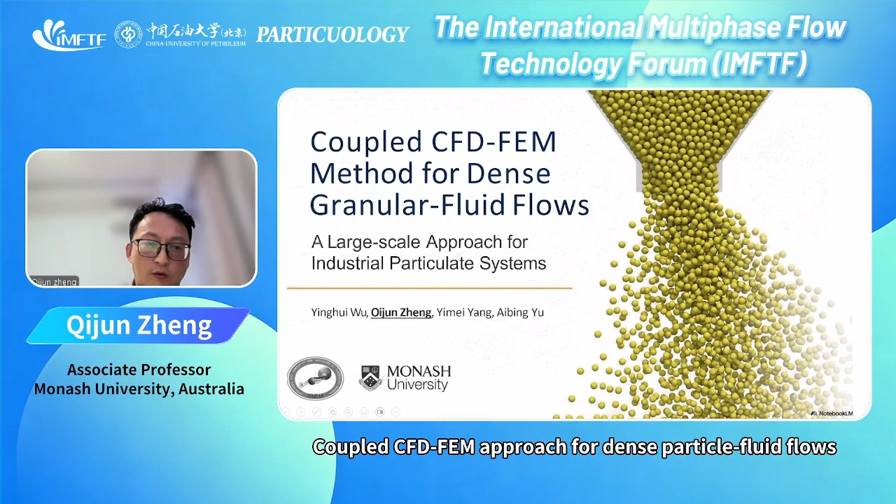This is work we have done in our group, by me under the supervision of Professor Aibing Yu, and recently other PhD students have joined this project, for example Dr. Yinghui Wu and Dr. Yang, who have also done a lot of work. This is the outline of my presentation.

I think Shibo has given a very good introduction about particles. Over 70% of industry products actually exist as bulk solids, and on Earth, particles like sand are the second most common matter after water. So I don't think I need to introduce more about particles.

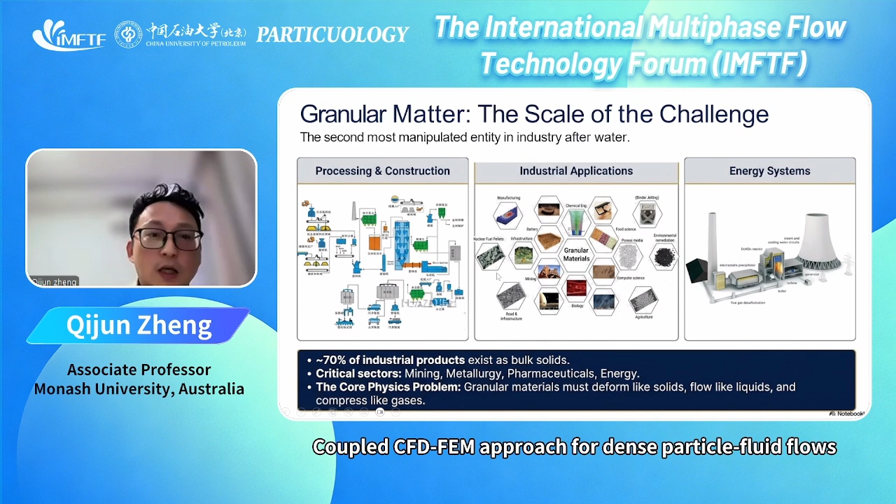So here's the problem: particles can behave very differently under different load conditions. For example, it can be very dilute, like a gas, or like a fluid, which we call dense flow. And in some cases it is quasi-static, so the particles don't move and keep still.

So currently, if we want to develop continuum models, there are different theories. For dilute flow we have kinetic theory. For dense flow we have viscoplastic models, or granular rheology models. And for quasi-static states, like soils and sand, we basically use elastoplastic models. So we have different models, and the different model frameworks are quite different.

But the problem is that in industries, in many cases the different states coexist simultaneously. So what we try to do in this work is unify the models for dense flow and quasi-static flow, because this is a challenge for current TFM models.

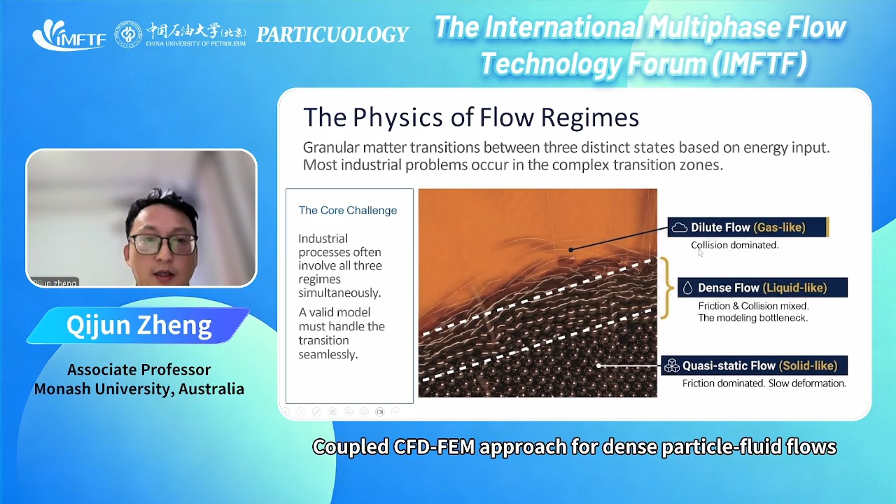Here I'd like to mention two popular methods. First is the discrete method, CFD-DEM. This method, as we all know, has high fidelity because it tracks every particle, but it is computationally very expensive.

The continuum model for particle-fluid flow is the two-fluid model, TFM, which can be found in commercial software like ANSYS. It's computationally efficient and works in a lot of situations, but when it comes to quasi-static or very dense flow, TFM often fails.

This is a well-known challenge, and the inherent reason is that TFM uses kinetic theory enhanced by a friction stress model to describe the particles. But when it becomes quasi-static, that kind of model is not that accurate.

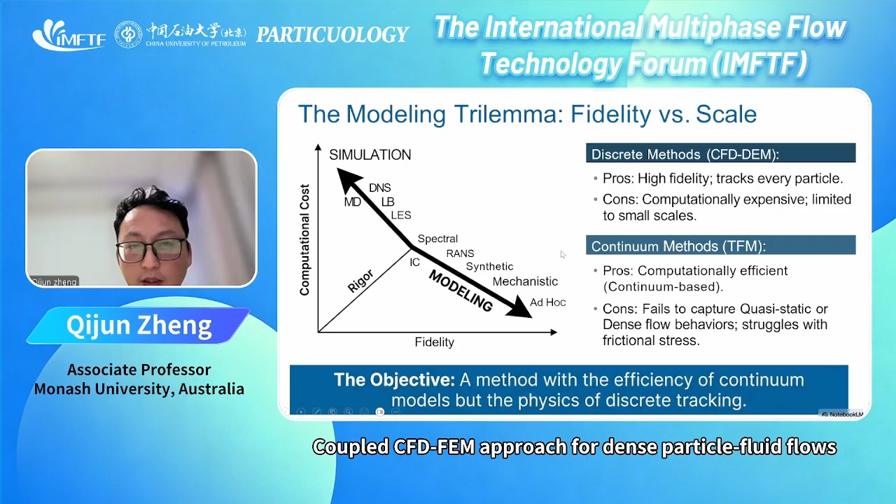So this is the overall idea of our project: we actually want to replace the kinetic theory with elastoplastic theory, because with elastoplastic theory we can well describe both the quasi-static and the dense flows.

But for this purpose we need a new method. We cannot use CFD because CFD cannot implement elastoplastic theory, so we actually need to use FEM, finite element method. But ordinarily in traditional soil mechanics we use Lagrange FEM, which does not work for us because, as I will show later, it often encounters mesh distortion problems.

So here we choose a new FEM method, Euler FEM. As shown in this figure, in this Euler FEM the mesh does not change with time — it's fixed, like in CFD. And the elastoplastic solids move through these meshes like a fluid.

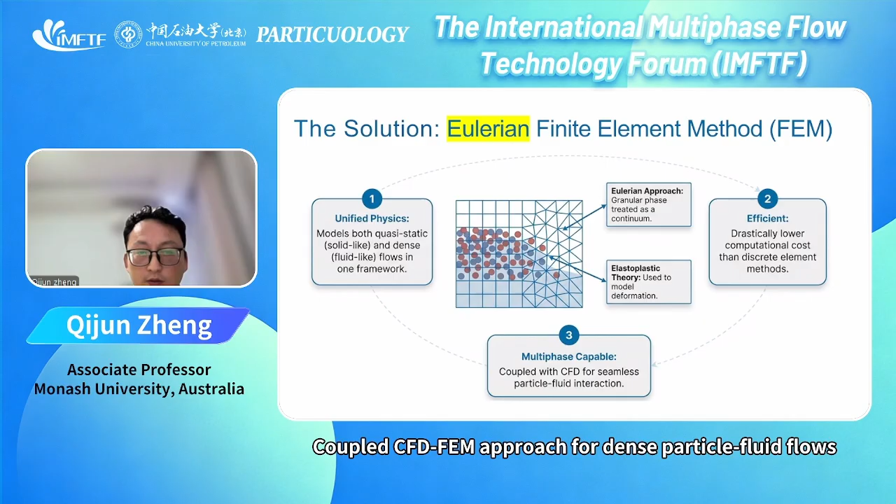We use FEM, Euler FEM for the particle phase, and CFD for the gas or fluid phase. In this project, we couple them, and this will formulate a new model framework for multi-phase particle fluid flows. We hope this idea will provide a new model framework for dense, very dense, or even quasi-static particle fluid systems.

In this talk, I will introduce our method step by step. First, I will introduce how we model the particle flow using the Euler FEM, then I will introduce how we couple the Euler FEM and CFD to create a new multi-phase flow code. Then I will introduce our validations.

Why Euler FEM? If we try to use elastoplastic theory for the particle phase, we cannot use CFD anymore, we need to use FEM. But as shown in the right figure, the ordinary FEM, like that in soil mechanics, when the soils or particles move, the mesh gets distorted. This is not a problem if the mesh quality is still good, but eventually the mesh quality downgrades and finally affects the results.

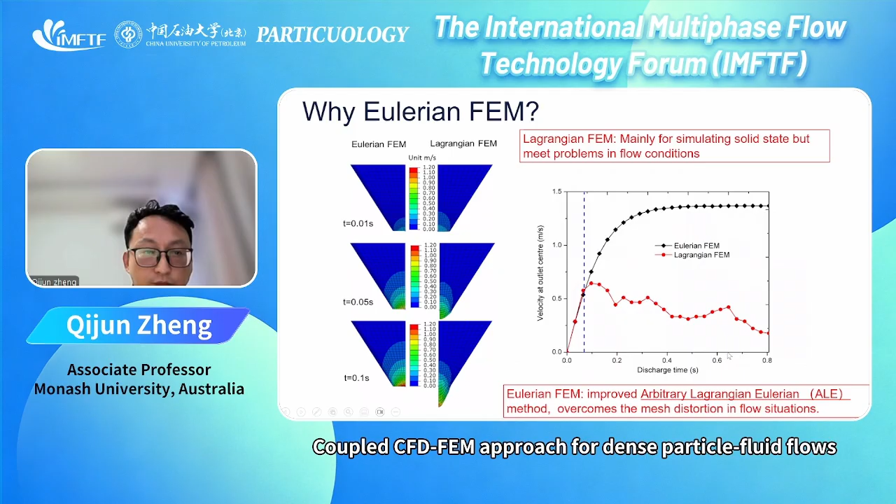That's the governing equation for the Euler FEM. Because it is in Eulerian coordinates, we will get the convection term. In this method, the density is a variable, so this is the compressible governing equation. We have the body force in the momentum equation, but different from CFD, here the calculation of the stress sigma is different.

In CFD, normally the stress will be composed of a pressure term and a viscous stress term, but in this model, we use a visco-elastoplastic model to calculate the stress sigma. Basically, if the deformation is small, the shear stress is small, not enough to drive the particle to flow, which we call the elastic regime, and the stress will be calculated using an elastic law. When the particles start to move, which we call plastic deformation, we use the second line to calculate the stress.

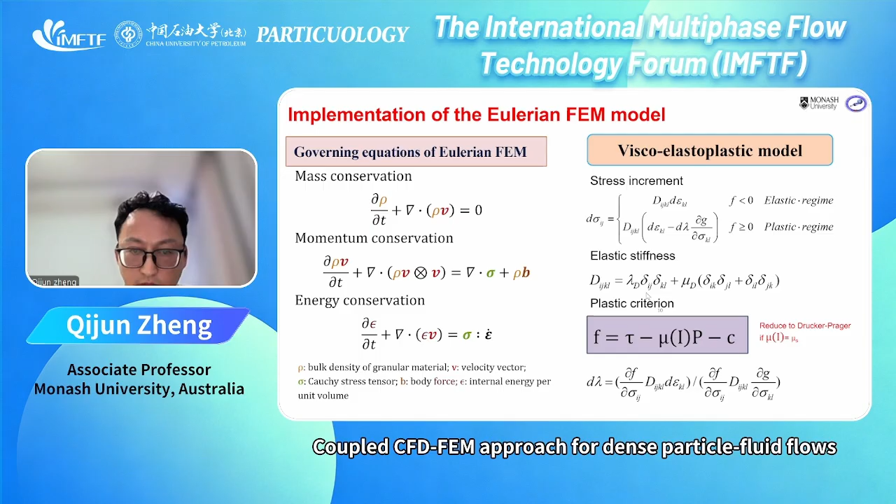Previously, we normally thought that the friction law is a very sudden change. Below that friction line, it's static, solid-like, and above that friction law is flow. But here, if we look more carefully, that transition is more complex than that. The transition is smooth, and also it depends on the particle size, or at least there is a length scale in the state transition.

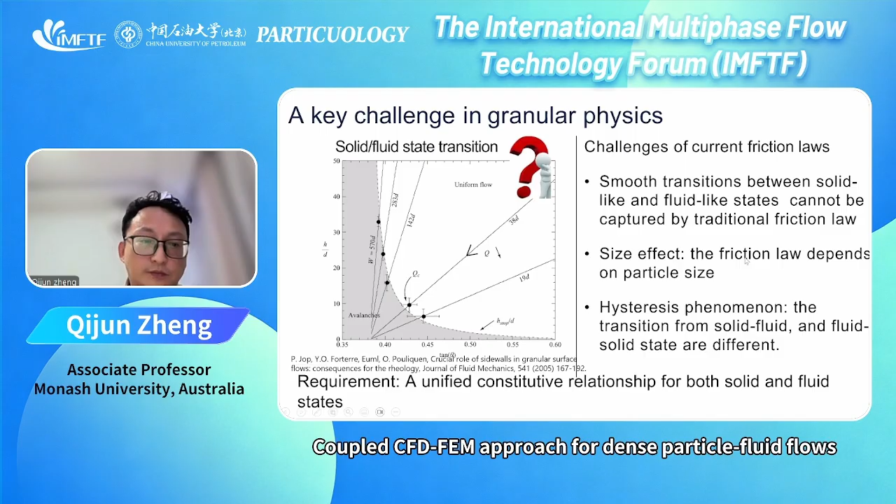So we did some work, theoretical work to address that challenge. I will not give details because today we are giving an overview of our method. I just mentioned we developed a new frictional law. This friction law includes the friction and dilatancy, and also interlocking cohesion.

We can see from this figure, microscopically the particles form many cages formed by the particles. So when the particles need to move, they need to go up for some distance. Previously we knew this and used the variable dilatancy to quantify this behavior.

In our research, we found that we still need another term, called interlock cohesion. This interlock cohesion scales with the particle diameter, the particle density, and also depends on the particle shapes. So we introduced this new friction law.

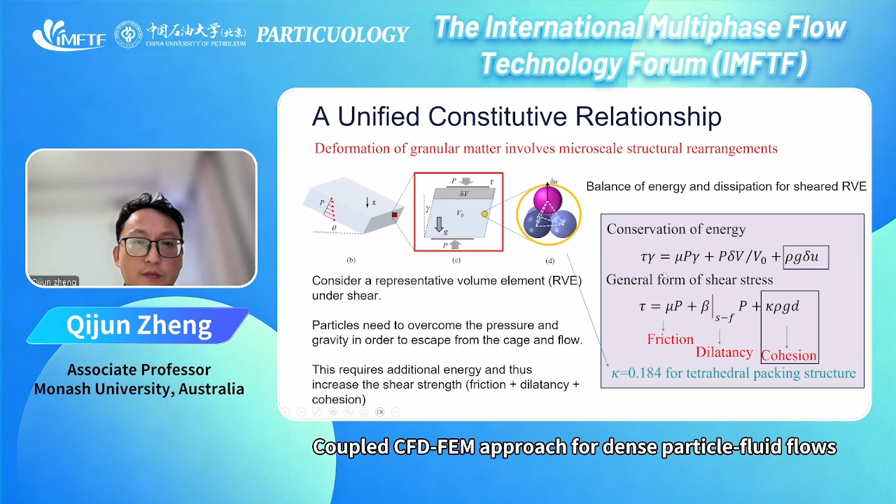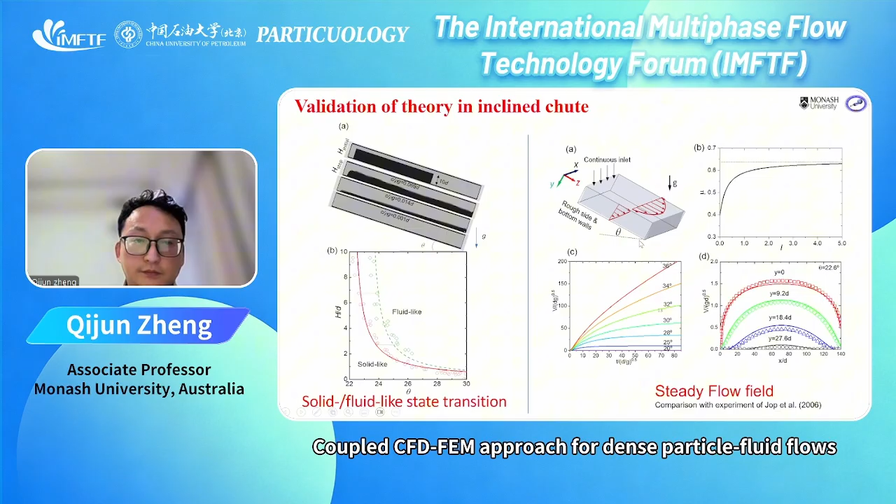So not just testing the model in the inclined chute, we actually tested it in many different granular flow configurations - for example, sandpile, hopper, rotating drum, and blast furnace. I will not talk about that in more detail; if you're interested, you can read some papers.

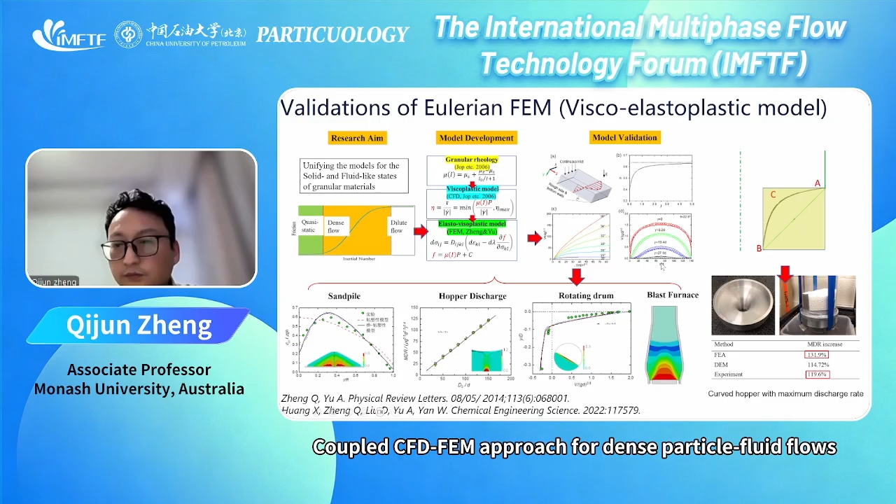So then we will move to the main subject of this presentation: how we couple CFD and FEM to generate a multi-phase flow code. Here is the overview of the CFD-FEM coupling.

Actually, this is a very ordinary method for the coupling, because many multi-phase flow approaches use that kind of method to couple two solvers. Basically, we write a Python code to connect the FEM and CFD.

Basically, we have two solvers, and the two solvers are separate. So we use a Python code to coordinate the two solvers. First the FEM starts, and begins to calculate the granular flow, and we then retrieve the velocity results and solid volume fraction from the FEM results. Also, we get the velocity from the CFD, and then we calculate the drag force, and apply the drag force and the body force to the granular phase and the gas phase.

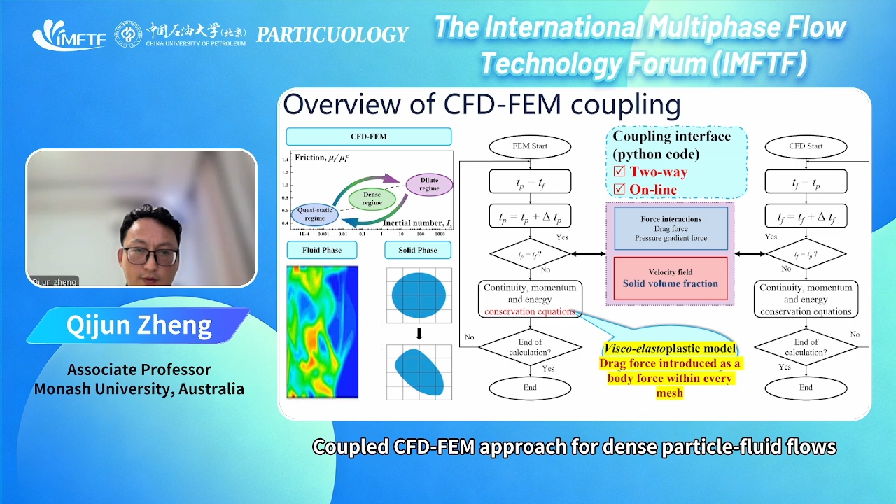So here, how can we make the granular phase become dilute? If we look back to the viscoelastoplastic model, as I mentioned, it has two components: the elastic law and the plastic law. The plastic deformation is often volume conservative. Let's imagine the deformation of some soils.

When the soil moves, the overall volume does not change. This is kind of a constraint imposed by the plastic model. So if we don't consider the dilatancy, the plastic model does not incur volume expansion or contraction. So in plastic deformation, the volume does not change - that means the solid volume fraction does not change.

But in the elastic law, of course, if you consider elasticity, the volume can change. Previously we mostly used linear elasticity, but the linear elasticity is too strong, meaning it's not easy for the bulk granular material to expand its volume or contract.

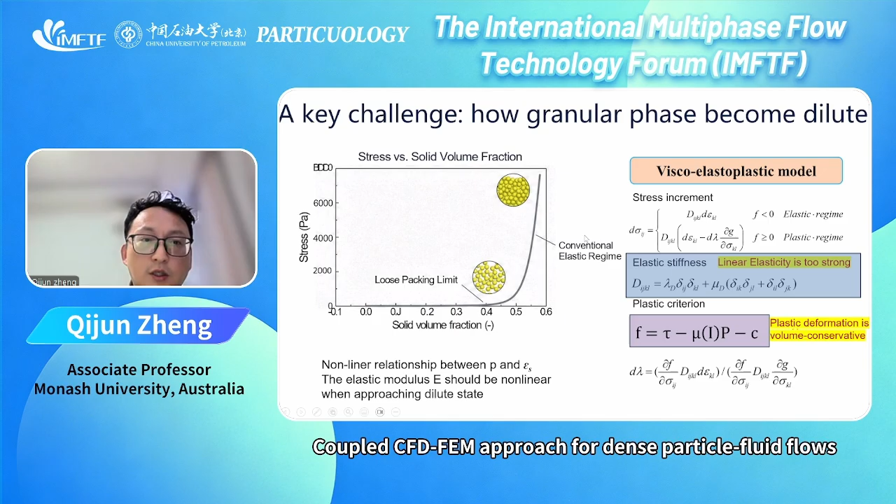So that's the idea. To get a law for the elastic modulus, we actually apply the local average method. We use DEM to model a hopper, and we use the average method to get the solid volume fraction and also the pressure. So that's the results.

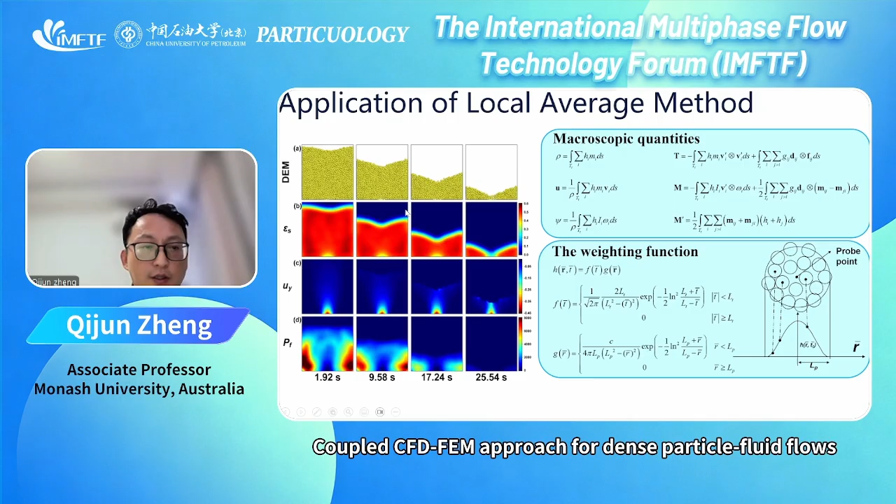Based on the results, we can get a nonlinear model for the elastic modulus E. Basically, when the solid volume fraction is larger than some value near 0.5, the elastic modulus is very large, so the deformation is small. But if it's lower than 0.5, the elastic modulus reduces to a very small value, meaning it can expand its volume.

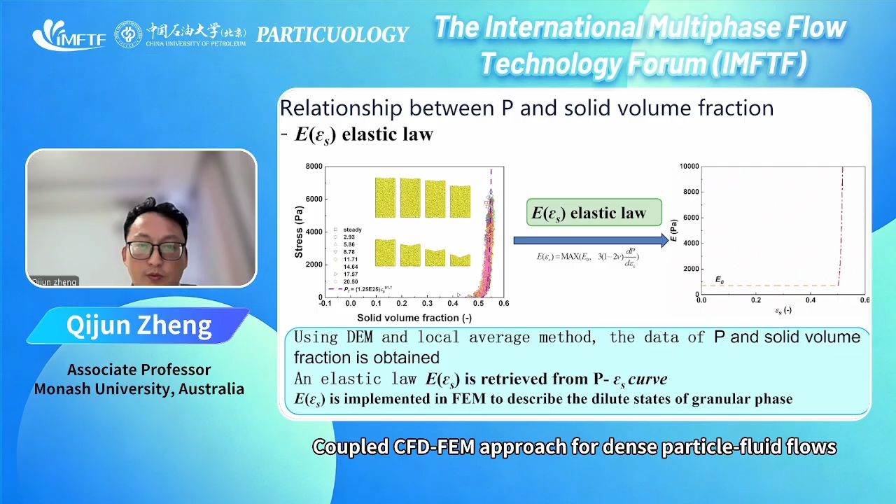Okay, that's a summary of the CFD-FEM method. That's the governing equation for the gas phase and granular phase. As I mentioned, in the FEM the bulk density is a variable, it's compressible. So we get the bulk density and divide by the original particle density to get the solid volume fraction.

We assume that the volume fraction of solid and the volume fraction of the gas equal 1, so we can get epsilon g and epsilon s. And we can use these variables together with the velocities to calculate the drag forces.

On the left are the constitutive models for the granular phase - that's the elastoplastic model framework. Then we introduce the mu(I) rheology, and again we use the elastic E(epsilon s) as the nonlinear elastic law. That's an overview of the whole model.

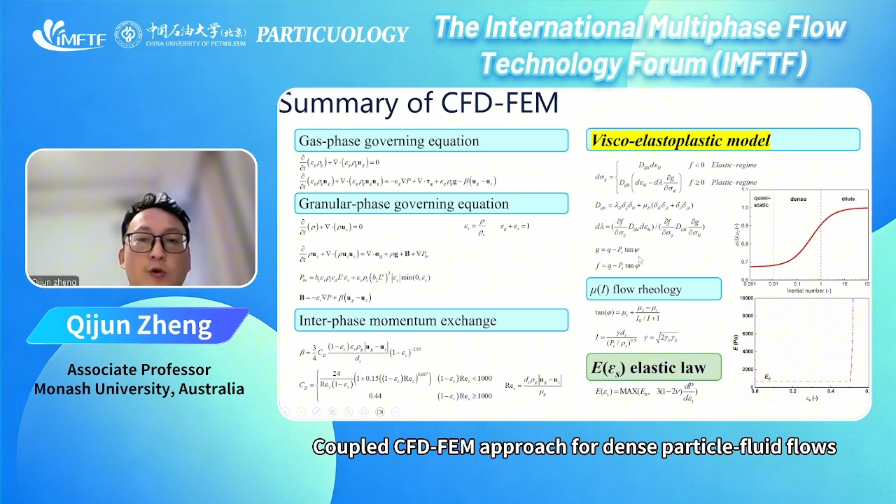Finally, I introduced several validation cases. The first one is the packed bed. The packed bed is very simple.

We inject the gas from the bottom uniformly, and then we measure the pressure drop, and then we can get the relationship between the pressure drop and the velocity under different cases - for example, different particle diameters, different initial solid volume fractions, and different filling levels. We can see that the pressure drop increased as it should be, meaning we actually implemented the drag force correctly in the code.

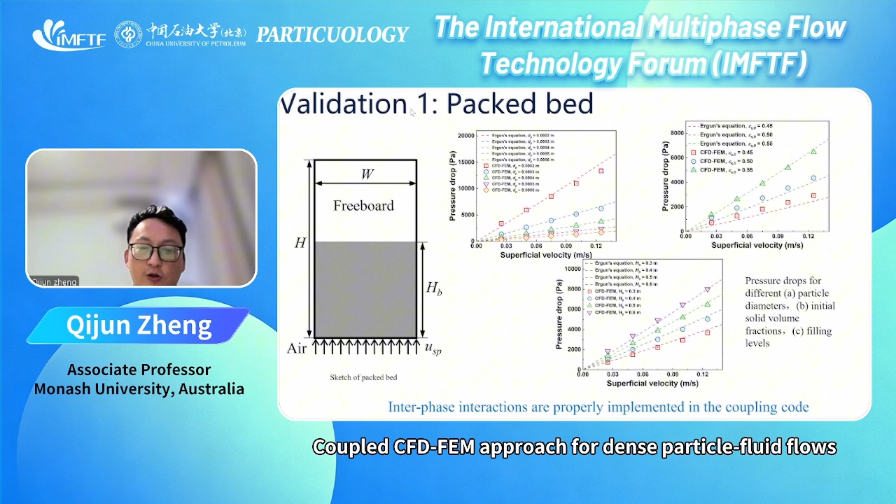Secondly, we model a spouted bed. Here is the animation with the bubble generated by injecting some gases into the granular particle bed. We compared the bubble size with the experiment, and of course if we use different drag force models and different parameters, the results can change somewhat.

But overall we can say it agrees reasonably with the experiment. Of course, the current TFM can model the bubble in the spouted bed, no problem. But we use this example to demonstrate that our method can also model this configuration.

And again, if we further increase the injected gas, it will become the fluidized bed. We actually wanted to reproduce the fluidized bed in this project, but up to now we've not been able to do that. This is a very interesting question.

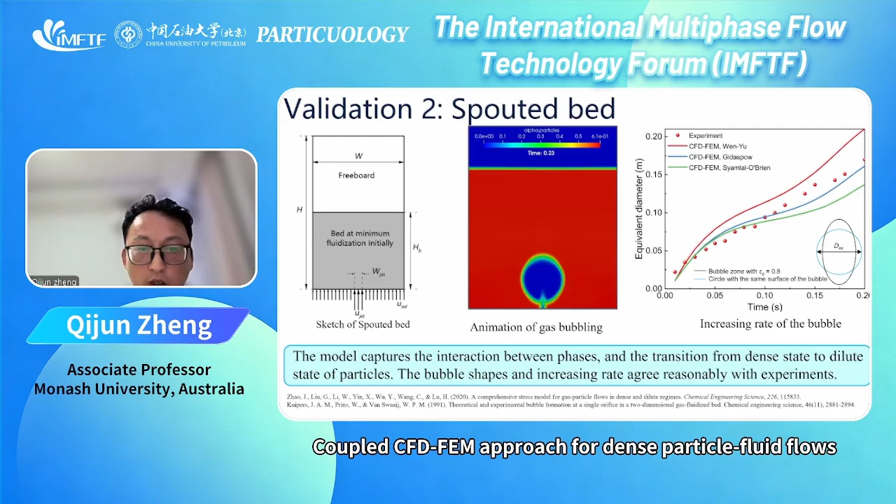So that's a limitation of the current CFD-FEM as compared to the TFM. We know that TFM has no problem reproducing the fluidized bed. But on the other hand, our CFD-FEM has some advantages compared to the TFM.

For example, here is a collapse of a particle bed in the presence of the fluid phase. This is like the situation of landslides under seawater, right? And we can see if we use TFM, as shown by figure C, the profile of this particle bed is not that accurate.

But if we use CFD-FEM, then we get a very good profile of this particle bed. That means if the particle becomes dense, or the gas phase is not that strong, the particle phase dominates the whole system. In that case, I think the new CFD-FEM approach will outperform the traditional TFM.

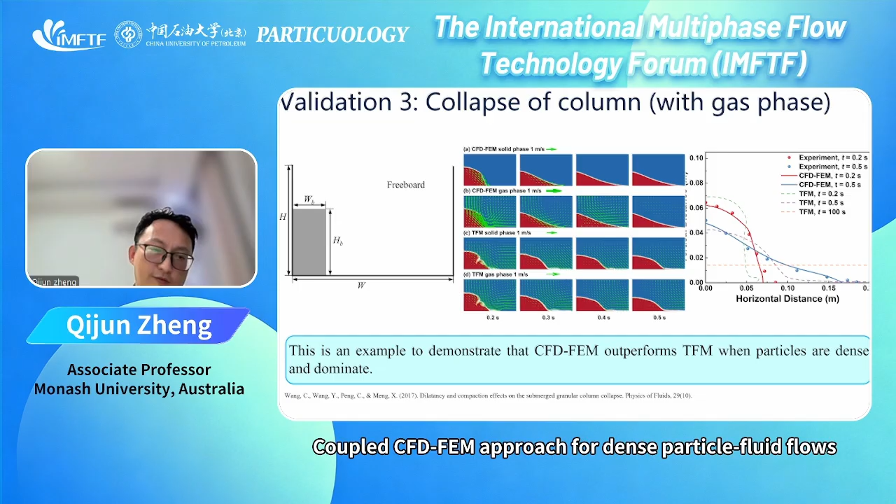The last case is about a cohesive particle flow in a hopper. This is a classical problem. If the particles are sufficiently cohesive and the outlet of the hopper is sufficiently small, the particle flow will stop, because the particles form a very stable arch above the outlet. This is a very cohesive and dense problem which can occur in many situations.

Up to now, I haven't seen any continuum models that can simulate this phenomenon. Here we use the CFD-FEM approach, and we can simulate the whole process of the arch formation.

Showing the figure on the right, we can see the small area near the outlet - that's the arch.

We compare our results with the theory used in the design of hoppers. We can see that most results basically agree with this correlation, which means the CFD-FEM results are reasonable, and it could have more potential to handle highly cohesive particles, with or without fluids.

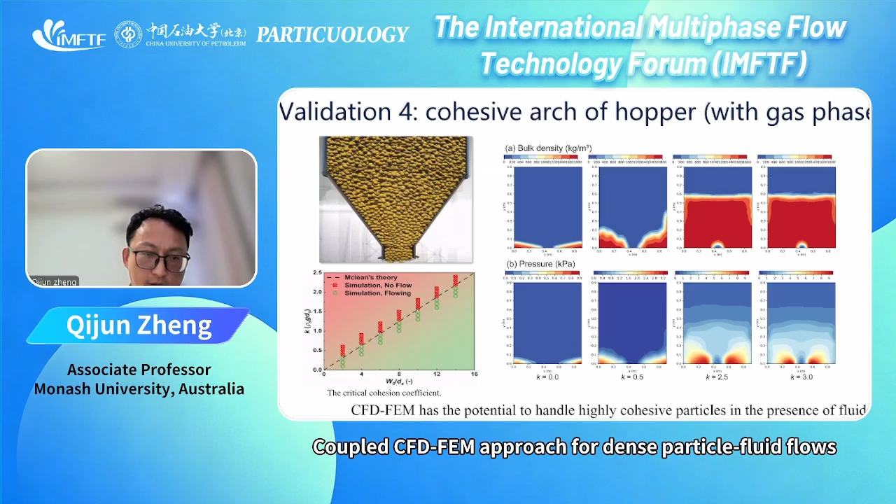Finally, I'll give a very short message about our work. Basically, we developed the CFD-FEM approach for the dense particle-fluid system. We use CFD for the gas phase and Eulerian-FEM for the solid phase. A core innovation of this new method is that it unifies the quasi-static and the dense flow states within a continuum framework, but it also has some limitations as I just mentioned.

This method is still under development. The scope of the application is not yet clear - we still need to explore it further. For example, the fluidized bed I just mentioned - we are not sure if this method can be used for fluidized beds or not. We still need more work to explore that.

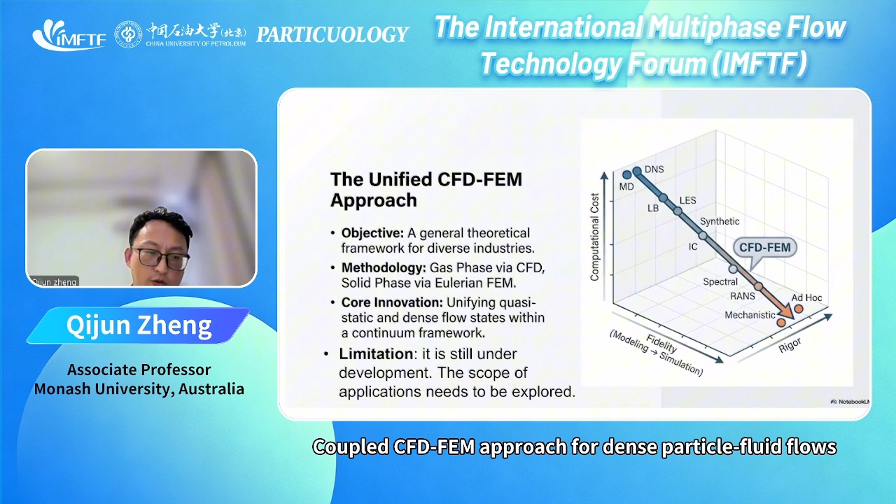Yes, very good, you give us another different story. Compared to Professor Kwan - actually, you'd like more details of your research. Okay, yeah, and I'd like to show you some questions.

First, I'd like to give you the question from Professor Kwan. His question is that particles become dilute due to particle-particle, particle-wall, and particle-fluid interactions. In the CFD and FEM model, is the dilute condition obtained from particle-to-particle and particle-wall interactions? Does he mean that understanding is correct?

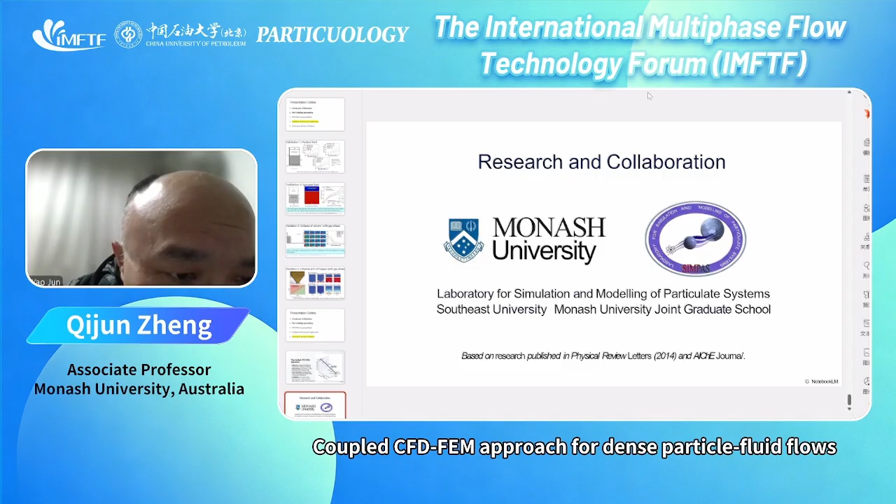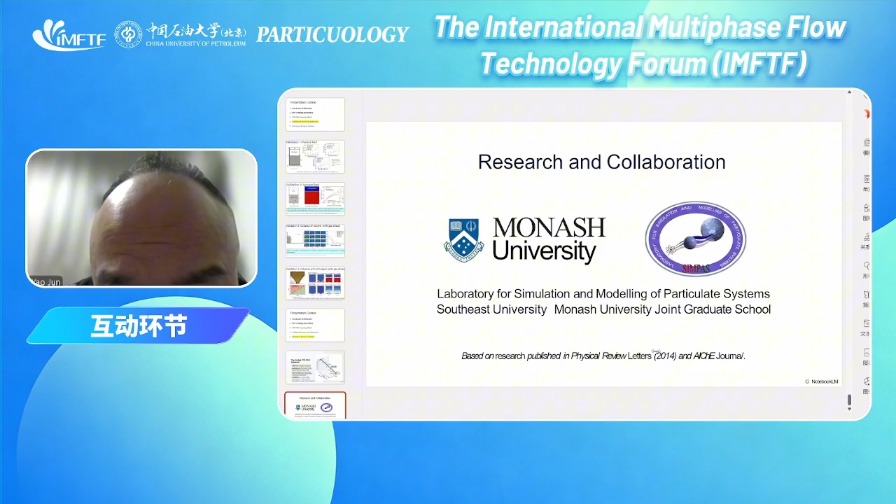Okay, so I'm reading the question from Shibo. Sorry, there are several questions. I'd like to show you a question from Shibo. I need some time to read the question. It means - does the CFD and FEM model's dilute condition come from particle-particle and particle-wall interactions, or do you consider other conditions between particle-particle and particle-wall?

We consider the dilution - I think the broad question is why the particle becomes dilute. Basically, it becomes dilute because of a change in the load conditions. The load condition includes the drag force, gravity, or some boundary forces. If the external force allows the particles to become dilute, then it will become dilute naturally in our model.

So you mean the dilution is not only from the particle-wall interaction, but also comes from the local fluid, for example the turbulence? Yes, due to this - the local flow is very complex. It may depend on the local flow and the drag force from the flow, causing particles to change their state.

So imagine if we consider a DEM simulation - why does the particle become dilute? Of course it's because of some forces - some forces drive the particle to move in different ways, and then it becomes dilute. Similarly, in our method, if there are no external forces, the particles will pack under gravity. Then if there are forces like drag forces flowing this way and that way, that will drive the material to flow in different ways, and it will become dilute.

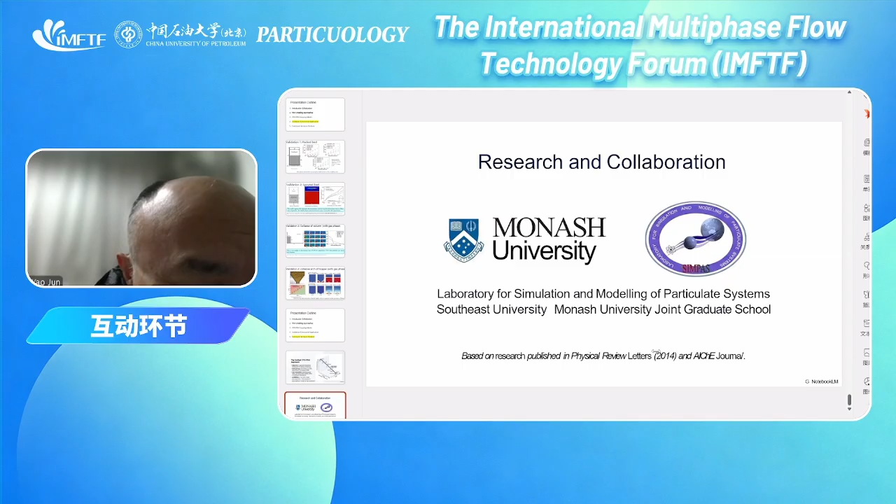Shibo's second question is: binary collisions play an important role - can the continuum model consider this phenomenon? Binary collisions...

Firstly, our model is a continuum model, so it doesn't actually consider the collision of two particles or three particles. I think Shibo's question is about very dilute situations.

Shibo, are you there? Can you further clarify? Yes, I just say in the transition region between dilute and dense, then probably particle contact is not lasting, and it's mainly binary.

So I'm not sure, like now in your FEM model, can you handle the condition where particle collisions are mainly binary? Mainly binary, because this is different scales, right?

Because we focus on continuum scale. In our continuum models, when the particles become dilute, the overall stress, inner stress between the particles will decrease. That's right, I think that's all for the continuum model.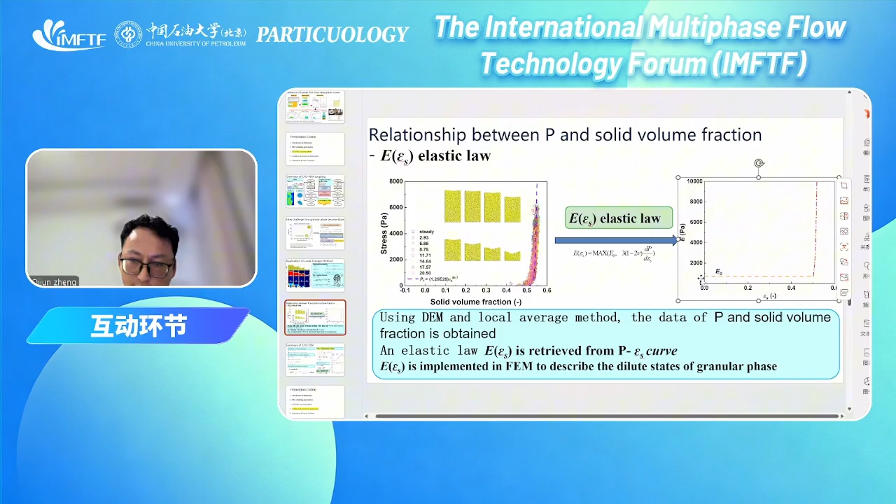Actually, it's quite similar, so that's the physics. If it's very dense, for example on this line, it can sustain very large pressure because the elastic modulus is high. But if it becomes dilute, it can only sustain very small pressure. It's similar to this line.

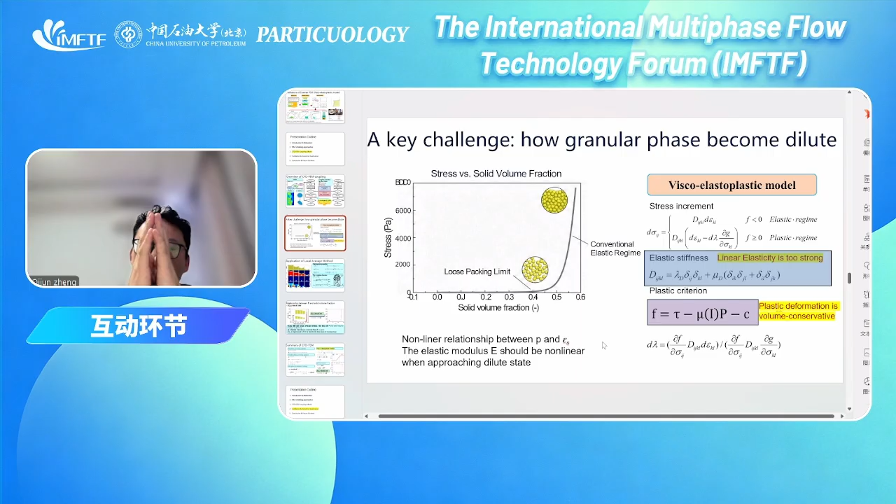Basically, I think in this regard, the relationship we used is basically equivalent to the model in TFM. Maybe we can have more discussion about the detail after this meeting. Yeah, you're right, it's very complex.

Okay, I'll give you another question, because outside on another platform, people have given a question. It's a very good question actually.

For large scale dense particle flow simulations, for example a system containing millions of particles, what parallel computing strategies, such as domain decomposition or particle grouping parallelization, does the coupling method employ? And how does the parallel efficiency decay with the increase of computing scale?

This is another very detailed question here about communication, this is very important. For now, we do not use a parallel computational strategy, and I think we can try that in the future.

Because as I showed in this presentation, all our development is mainly in the theoretical model. So we actually utilize some existing software, for example OpenFOAM. As far as I know, both software can use parallel computation.

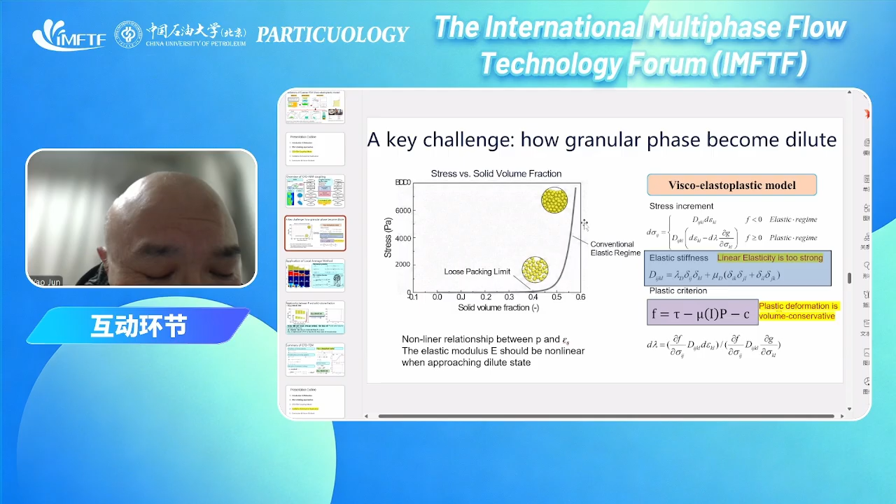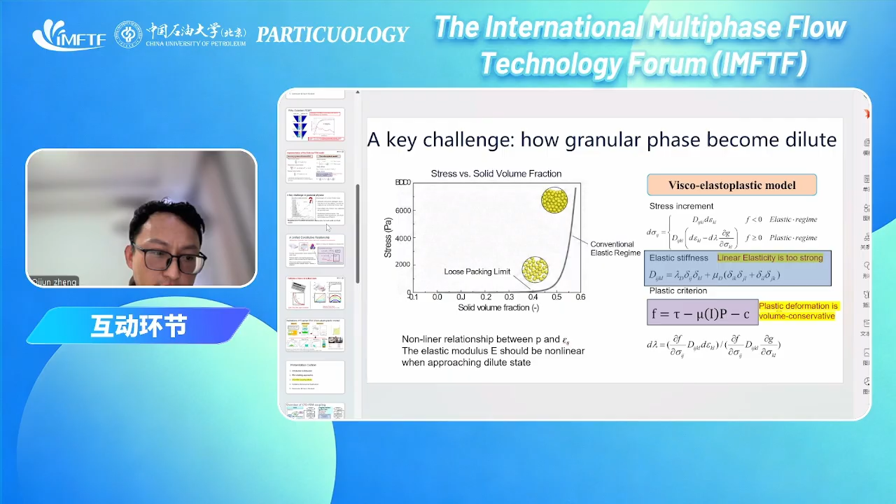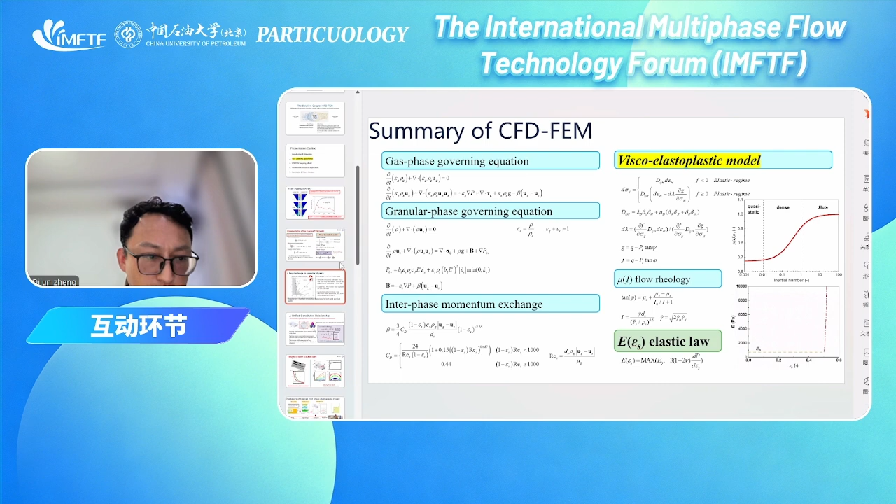Yeah, in your simulation, I will probably go through that. The most important effect of particle size is in the drag force, I think, right? This is similar to TFM. In our methods, the drag force depends heavily on the particle size, and also in the constitutive relationship for the granular phase, the friction law also considers the particle size effects. So the question is, is that enough?

Is that enough? Does this model consider every aspect, every effect of the particle size? I think, according to the simulation results and understanding of the previous literature on multi-phase flow modeling, it already captures most of the particle size effects. You can imagine what's the major difference between small particles and large particles in different flow systems?

Okay, so just now Shibo also asked how you consider particle and particle-wall interactions. I'm thinking, due to particle and particle-wall interactions, particles may break, and big particles become smaller particles, so the particle size is changing. For your method, in the future you could also consider how these interactions between particle and particle wall lead to phase changes from dense to dilute. I think that's very interesting, depending on your method.

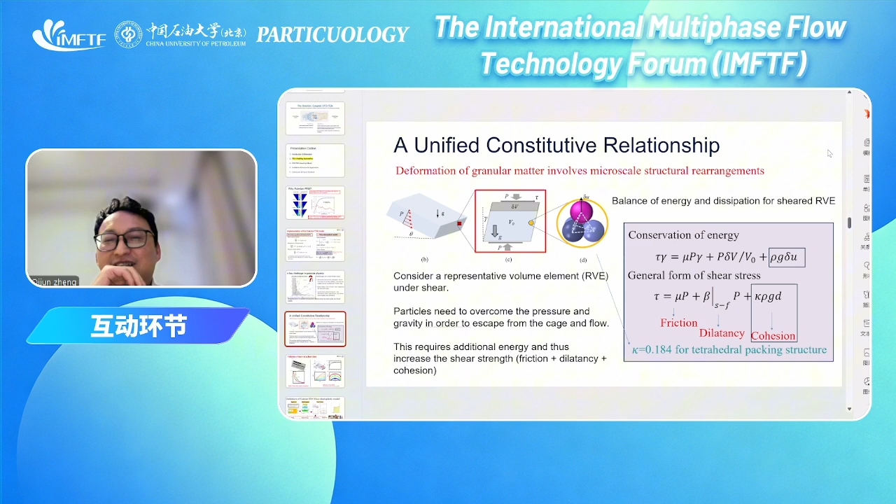Because currently we kind of use the average of different particle sizes. We cannot consider the individual particle size in our model. We basically treat a bulk of the particle size and take an average. But if the particle sizes are different, that could be very interesting, and very challenging.